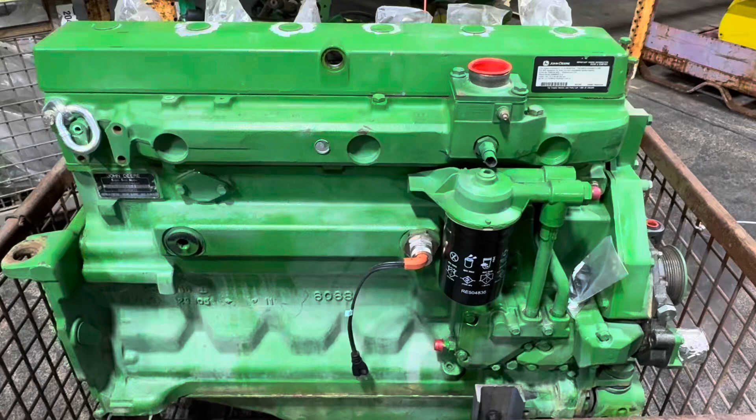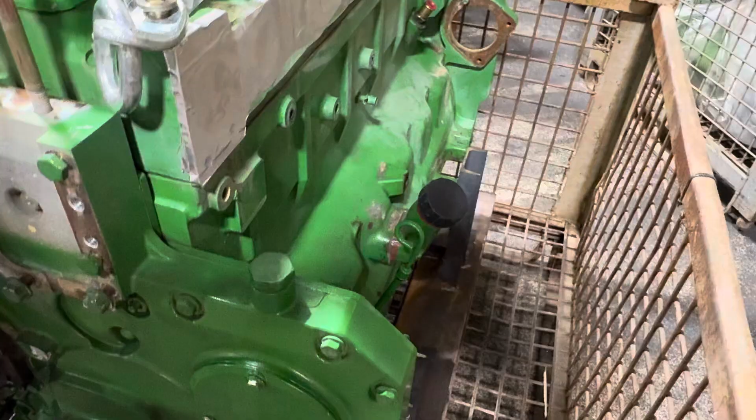I wanted to give an example of our certified used engines. This is a John Deere 6.8 liter. It's a mechanical fuel pump, so it has mechanical injectors, not a high pressure common rail. We take the fuel system and the air system off and just do valve cover, oil pan.

So when we do that, we make that engine fit a lot more applications in that state. So here's the testing procedures.

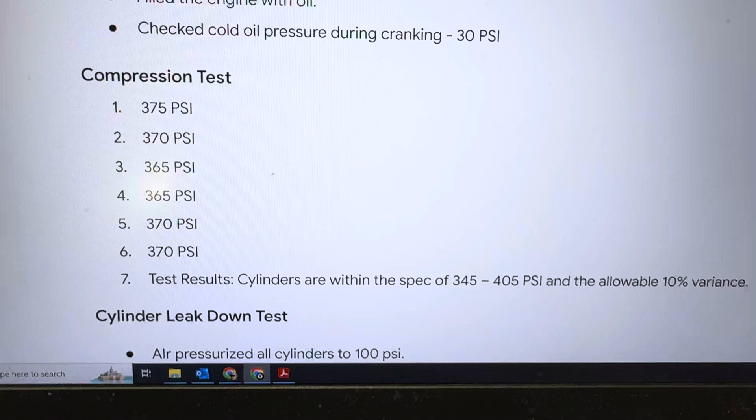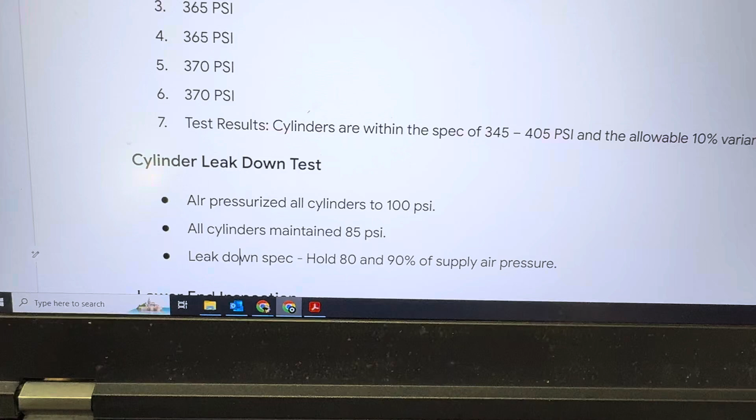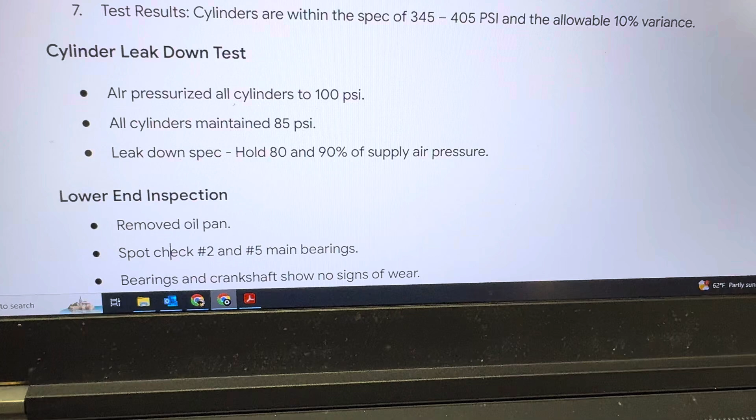We do an oil pressure test, a compression test, then a cylinder leak down test. We pressurize the cylinder to 100 PSI with air. All cylinders maintain 85 PSI. The spec on that is 80 to 90% of air pressure, so it's within spec. We do a lower end inspection.

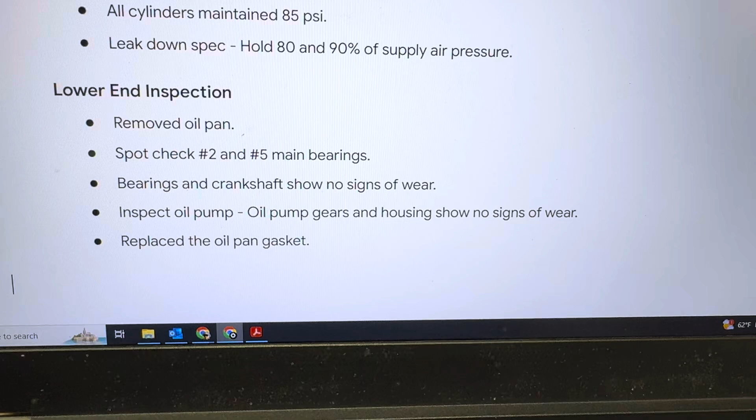Remove the oil pan, spot check number 2 and number 5 main bearings. The results here were bearings and crankshaft show no signs of wear. Inspect the oil pump, and we replace the oil pan gasket.

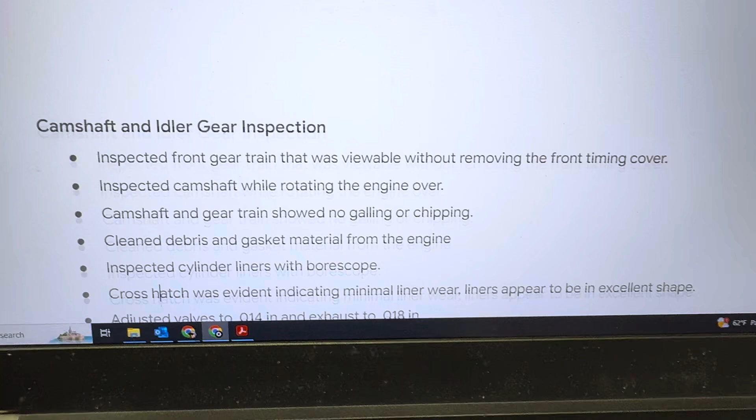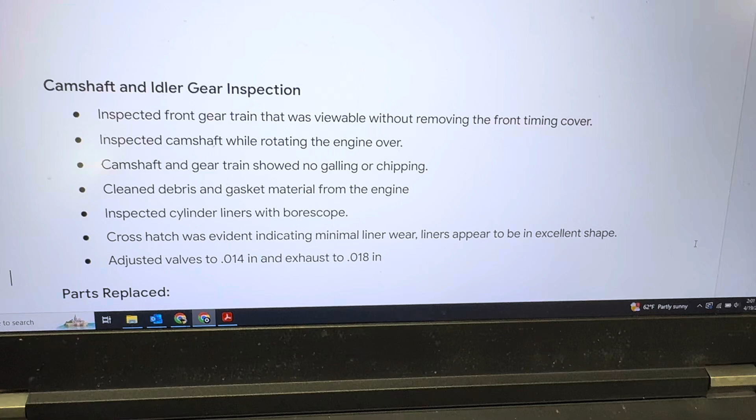Then we check the camshaft and lifters, camshaft and idlers. Inspect the front gear train, which is viewable without removing the timing cover.

Inspect the camshaft while rotating the engine over. Camshaft and gear train show no galling or chipping. Clean the debris and gasket material from the engine.

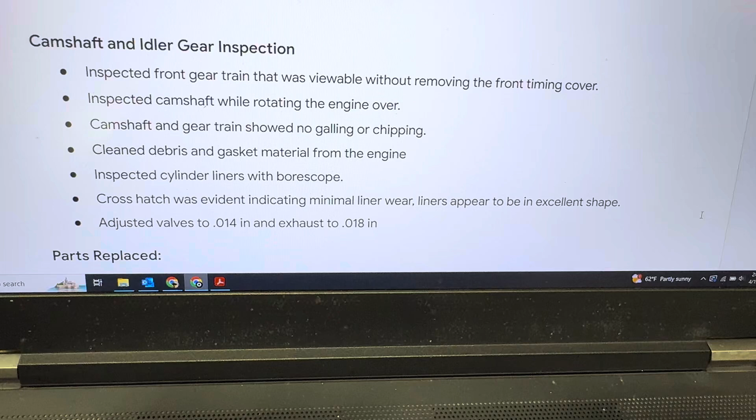Inspect the cylinder liners with a bore scope. Crosshatch was evident, indicating minimal liner wear. Liners appear to be in excellent condition or excellent shape. Then we do a valve adjustment.

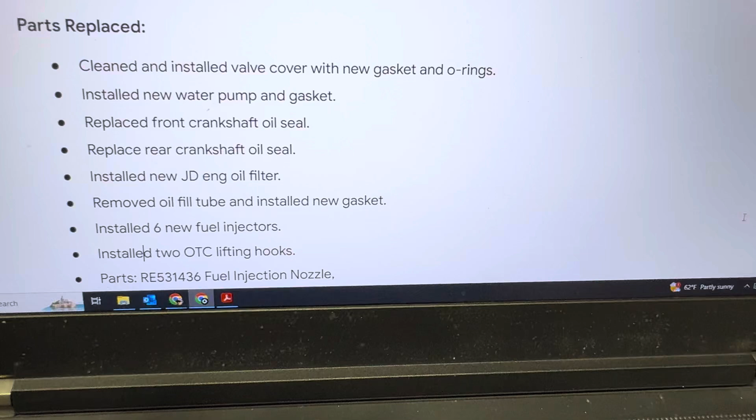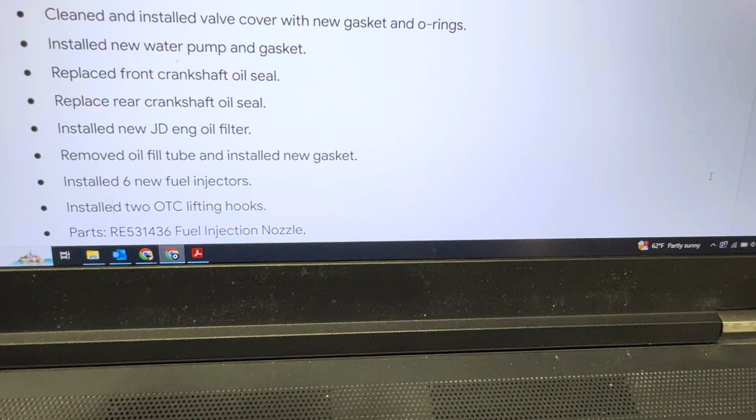Here's all the parts that were put on it: valve cover gasket and O-rings, new water pump and gasket, front and rear oil seals or crankshaft seals, John Deere oil filter tube, new gasket on the oil fill tube, 6 new injectors, OTC hooks, and fuel injectors. Looks like we got some repeated in there.

It's been thoroughly inspected, so we know that it's good. Because it's been through the testing procedures, we consider it to be certified. Anything we can put through an operational or OEM test to know that it's good would be certified.

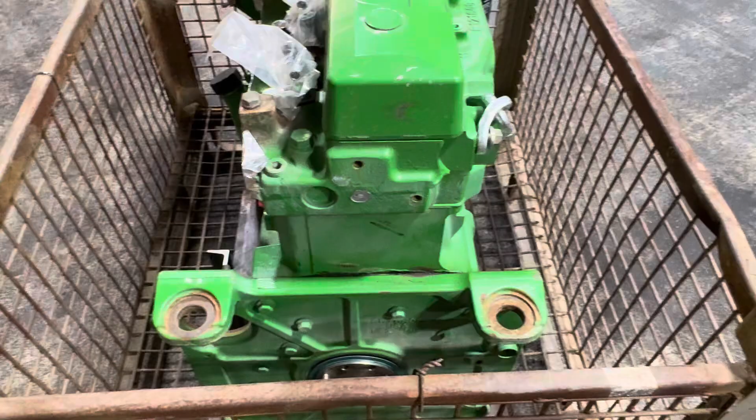We do put our heat tabs on, so if you get the engine hot, that's going to show up. That would be a non-warrantable failure.

So we want to make sure you got a good cooling system, which is part of the reason that we have our water pump on, and our oil cooling system on. Those are things that are going to protect the replacement engine if you had a failure in yours.

Each one of these engines will have its own unique build sheet or repair sheet. And if we get one that doesn't meet the spec, then that sheet will look a little different because it'll tell you what we did to it in overhaul.

The whole idea of this is to get away from the word reman that most places use, and it's a very overused word. It's not a very understood word, and basically the customer makes assumptions that everything in it is brand new. Your OEM does not put everything in a reman XYZ brand new.

Yes, the wear parts are new, same as ours, so it's just important to know. We would prefer to tell you what we did so that there's no misinterpretation, and you can make a good buying decision based off that information.